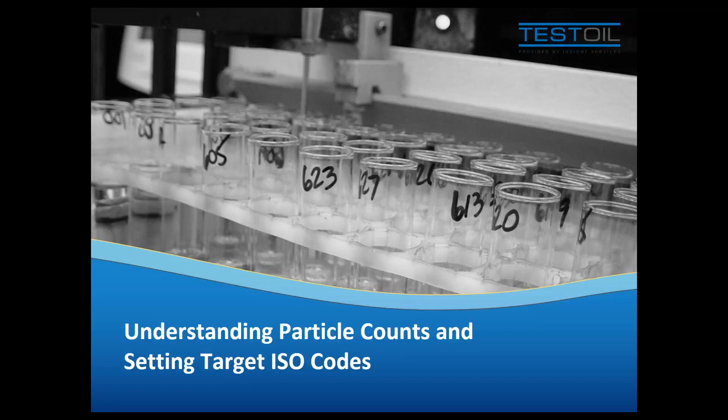Today's presentation is about understanding particle counts, which will be about half the presentation, and then we'll finish up with a little bit on setting target ISO codes. But before I get into any of that, I thought it would be best if we begin with a discussion about why we're so concerned about particulate. Why are we doing a particle count in the first place? That helps us understand to a point what we're trying to achieve here.

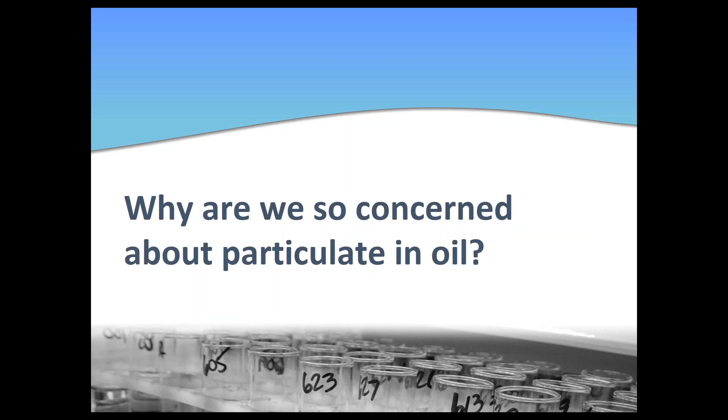I've got three different studies I'd like to show you. They're all widely cited. Lots of people have used them, so you might have seen some of these before. The first one's kind of one of my favorites. This one's by Dr. Rabinowitz, and he was working at MIT, and he did quite a few good studies.

This one, he was looking into the causes of premature failures, but most correctly, he termed it a loss of usefulness. This came out of the Nolan and Heap report when they were suggesting that the word failure needed a better definition, because most people attribute failure to a component basically blowing up or ceasing all operation. They suggested that really a failure was defined as when something doesn't operate the way it should. That definition was further expanded by John Moubray when he wrote Reliability-Centered Maintenance, basically the bible that we all use. So Dr. Rabinowitz was using that same terminology, a loss of usefulness.

He said, what's the greatest cause for loss of usefulness? As you follow this to the right, you can see that surface deterioration is the number one out of the three choices. He chose the word surface deterioration because it's not just a fancy way of saying wear, but because he wanted to differentiate the type of wear. So again, if you move to the right, we see that wear, meaning physical wear, is the biggest cause of surface deterioration, more so than, say, corrosion.

Now, of wear, one of the largest slices comes in the form of adhesive wear, but also abrasive wear. And of abrasive wear, the largest slice seems to come from what we call three-body abrasive wear. The difference between three-body and two-body is with two bodies, you have two metal surfaces coming into close contact with each other. One surface rubs the other, and one of the two surfaces will lose. Basically, it's your sandpaper and wood kind of comparison. But three-body abrasion is when those two surfaces come into close contact, and they may or may not contact each other, but they will have some form of particulate in between them, and that will be rubbed against both surfaces.

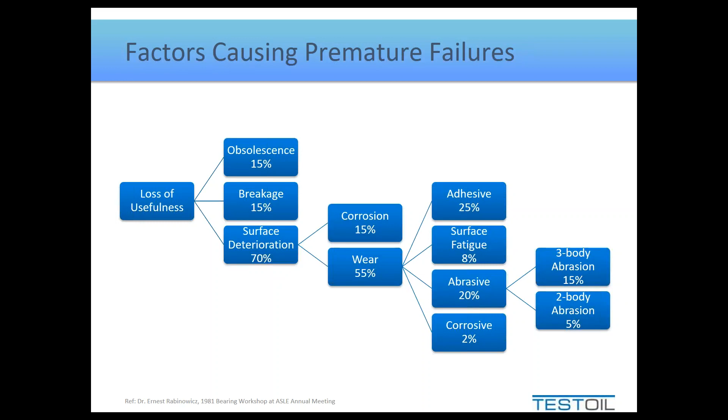Again, at least one of those two surfaces will lose, and that's where we start to see the wear. So the point of this study is that the largest slice of the largest slice of the largest slice is particulate related. That's why we get so concerned about particulate contamination, because it can be attributed to a significant amount of the wear or loss of usefulness that we experience, but it's also one of the most easy to control.

Now, one of the other studies that exists out there is from the National Research Council, and it was trying to define the economic impact of various types of wear mechanisms. As you can see, the largest slice of this is abrasion, which is your two and three body abrasive wear. Then there's adhesion, which is no surprise based on the previous study, but also let's include erosion.

Now, erosion is the same as sandblasting, so this is when particulate is flowing in the oil, and it either encounters an orifice or a rapid change in direction, like an elbow, and the particles will impinge on the surface and create wear. Now, of those three slices of this particular pie, they total 82% of the economic impact due to wear.

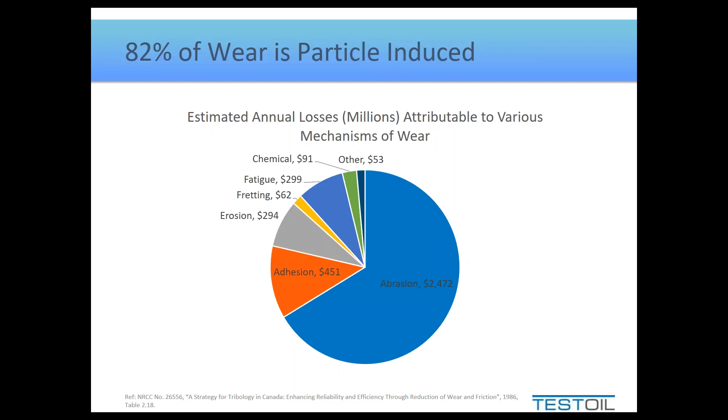So that's where we're getting the title that 82% of wear is particle induced, because these are all going to be accelerated or only capable because of particulate.

The one last study, this one's from a bearing supplier, identifies the most common causes, and the key word here is premature bearing failure, because all bearings eventually by design should fail. But if they don't reach their L10 life and fail early on, the largest causes for that are, again, you guessed it, contamination.

This is why we're so concerned about particulate contamination, because no matter what studies you look at, no matter what the percentages work out to be, it's always the largest slice of the pie. And like I said, it's one of the easiest to control, one of the easiest to justify, and one of the fastest reacting changes we can make to a system is to improve its cleanliness and see that we're reducing wear and increasing uptime and all the good things we're looking for.

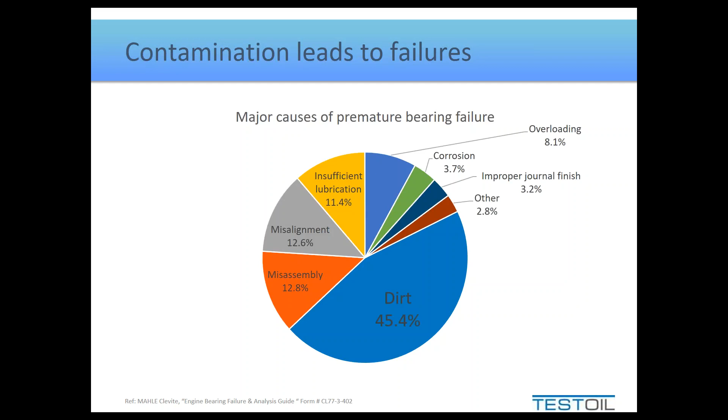So the next question comes down to, well, how big is this particulate? We know particulate's the problem, but how big is it? Because we need to know how big it is if we're going to try and find a way to mitigate it or remove it in any way.

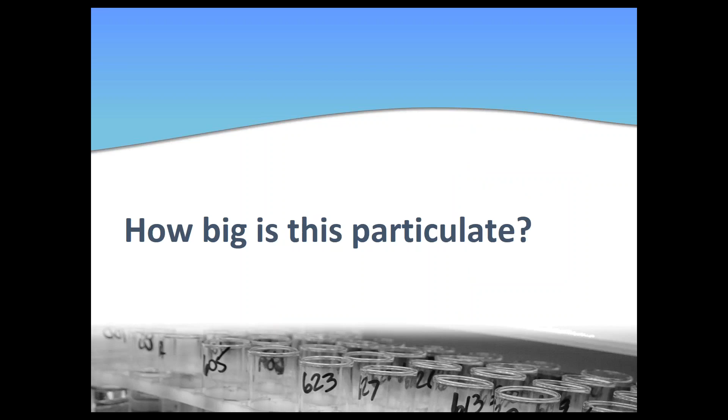Just to begin with a quick definition, so nobody's in the dark here, I'll be using the term micron. For those that aren't familiar with what a micron truly works out to be, it is 1/1,000,000th of a meter. Whether you say micron or micrometer or millionth of a meter, they're all the same thing, there's no difference. For those of you who work in the imperial system, it's about 0.00004 of an inch. So we're talking about a pretty small particle here.

Just to give you the visual comparison, human hair is often used as a good example. It's about 80 microns as a cross section. When we start thinking about dust, it's about half as big.

Now, when we talk about dust and mention this 40 micron value, this is often cited as the lower detection limit for human vision. 40 is the approximate limit for somebody perhaps over the age of 40. But if you're a little younger, or have decent eyesight and don't use corrective lenses, you can truthfully see down to about 25 microns. But whether you stick with 25 or 40, it doesn't really matter.

The point is, as you get smaller and smaller, you start getting into the range of powders and airborne contaminants. And this is where we will concentrate.

So just to show you what size we're going to be dealing with, here's one study. This is done by a bearing supplier, and it's showing the effects of filtration on bearing life. We can take this kind of at face value, because this isn't data from a filter supplier trying to sell us filters. It's from a bearing supplier trying to encourage you to filter your oil so that you'll get the proper life out of your bearings.

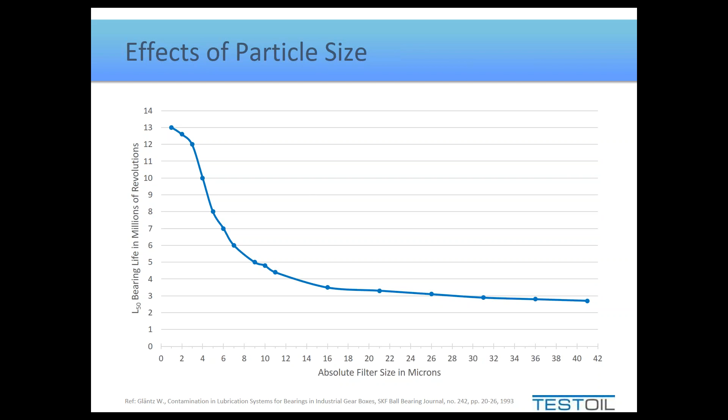So we are talking about some pretty fine filtration yielding some positive results. So then the question is, well, what's the most damaging size of particle? There's a couple different answers that have been published to this question, and here's 2 of them.

But really, what we're seeing here is that we're talking about very, very small particulate. These are the types of particles that actually cause the damage. The larger ones really are of little concern to us because they typically don't cause that much damage.

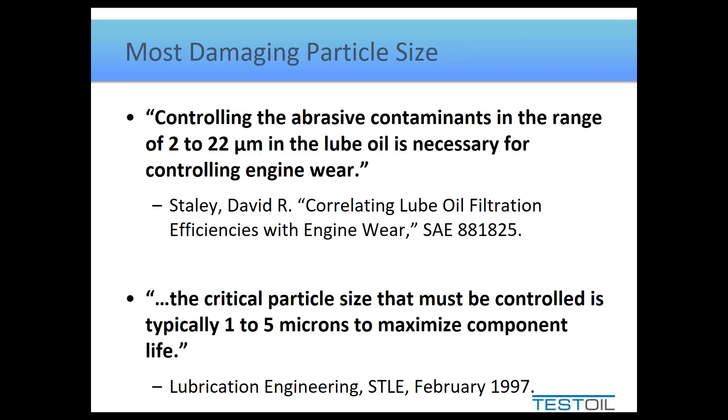Because the best answer to the question of what is the most damaging size particle is clearance size particles. And why are we so concerned about clearance size particles? Because they are the ones that cause that 3-body wear. If a particle is larger than clearance, it can't get in between 2 metal surfaces.

If it's smaller than clearance, it'll go through without contacting either surface. But if it's at or near the clearance size of the 2 parts in motion, well then, we've got a particle that can impinge upon one or both surfaces, causing some damage. And that, of course, is everything we're trying to avoid.

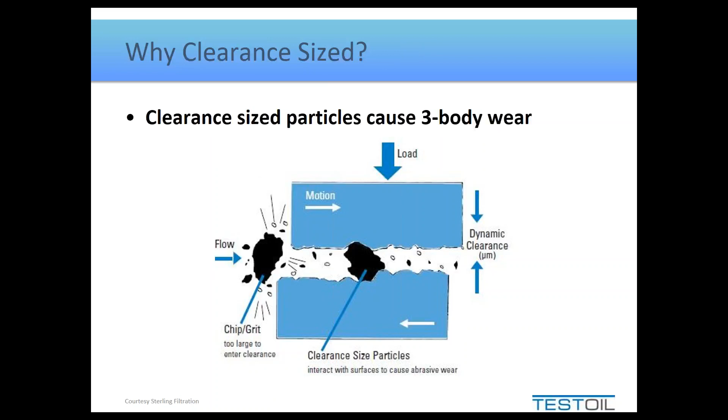So to show you why those 2 answers on the previous slide are kind of the same answer, just take a look at the typical clearances that can be found in many types of components. They do bracket within that 1 to 5 micron statement.

And to be fair, they also fall heavily within that 2 to 22 micron statement. So the point is, we're dealing with clearance-sized particles. Those are the ones that are damaging. Those are the ones we need to be concerned about.

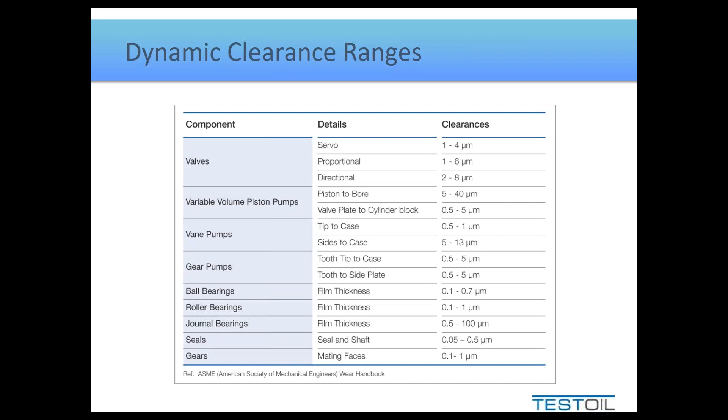Now, the next question typically we have is, even though we know that we need clean oil, we know we want to deal with small particles, we now have this question: where is it all coming from? Because if we know where it's coming from, then maybe we know how we can deal with it.

Because some of it we might be able to stop from ever happening, and some of it we have to take different measures because of where it's being created.

So basically, there's going to be about 3 sources. It's either coming from the outside, it's being generated on the inside, or it was there long before we even got there. So just to walk you through a few of these, I'll spend most of my time on the internally generated.

Because that is of the greatest concern. But I'll walk you through some examples of where they come from in all 3 cases.

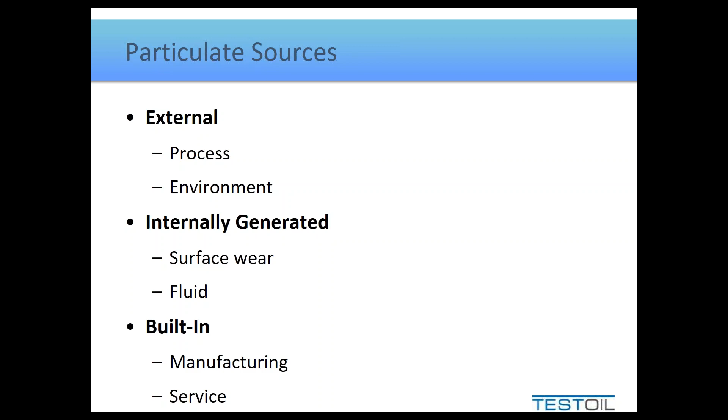From external sources, we have everything that could be airborne. So there's a lot of process-related debris that occurs depending on what you have the machine doing. So if we have the machine operating in an outside environment, well, certainly there's the ability that there's airborne dust.

But what if the machine's actually creating this dust? It's not just from the atmosphere. So I've listed a few things in the process-related column.

And the things I've listed over in the environment are what do we have as mitigation strategies. Right? We know this is in the environment. Even if it's not process-related, there's still going to be airborne contamination.

Well, we have all these strategies to hopefully deal with them. Right? We put breathers on them to try and allow the machine to breathe, but not breathe in a lot of this dust and dirt and whatnot. We might have seals around certain openings or shafts or things like that. We have, of course, a way of getting oil in, and we might even have inspection covers.

But basically, any dipstick, oil plug, fill cap, cover hatch, you name it, is a potential path for the particulate to get in, and anything that may be in the atmosphere is, of course, deemed a contaminant and we're trying to avoid.

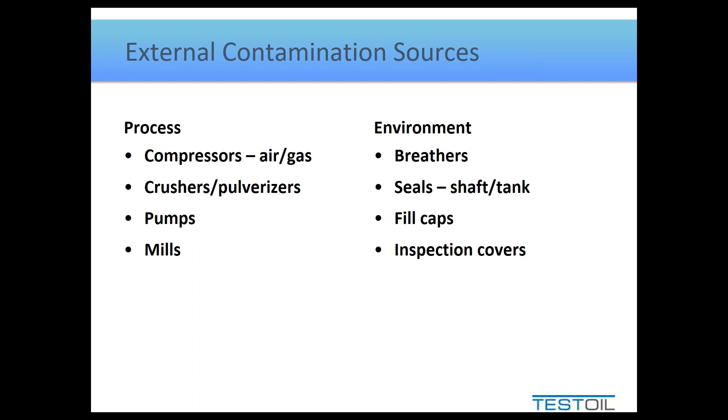But the internal ones, these are the ones that are of greater concern to us because these ones are harder to prevent from occurring and harder to remove once they've been created.

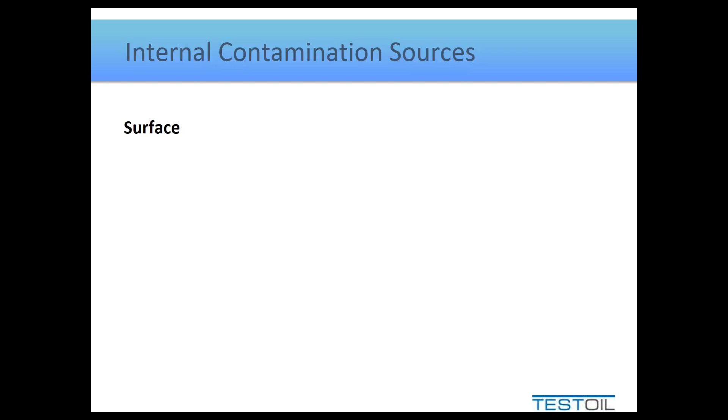So under the surface category, we've got a bunch of different wear modes that can create debris. And these are all because they're wearing at least one of the surfaces that is being contacted by the lubricated parts. So when we have abrasive wear, like I said, that's when one surface rubs against the other one and one of them loses.

If there's 3-body abrasive wear, well then we have a particulate in between, but again, at least one surface is going to lose, possibly both.

With adhesive wear, we have basically a scuffing motion. We have two surfaces coming under contact, and there's a bit more of a pressure gradient here, pushing the two surfaces together, and essentially one is going to smear or scuff off material from the other surface.

If we've got any form of air entrainment in the oil, we can have cavitation, and cavitation is when these bubbles implode and they impinge upon the metal surfaces, generating more wear debris.

Corrosive wear is simply when we have oxides forming. So as the metals come into contact with water and oxygen, we can form oxides. Those oxides tend to be a softer layer on the metal surfaces. It rubs off a bit more easily, so you will get a wearing surface and you'll be generating corrosion debris.

Erosive wear, as I already mentioned, that's kind of like sandblasting. So that's any particulate impinging on metal surfaces.

We've got fatigue wear. Generally speaking, even the most well-designed system with the proper lubricant and everything will run long enough that you will cause fatigue to some of the parts. And as they fatigue, spalls form, and spalls become a contaminant now.

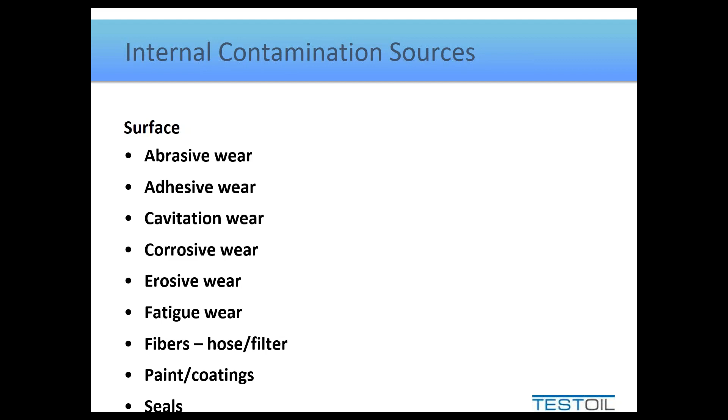About the only other thing that may generate particulate and is not often considered is the seals themselves. We use seals on tank lids, hatches, and so on, and I'm not saying those seals are going to generate particulate. But when we use a seal on a rotating shaft, sometimes the seal itself wears and generates particulate, and sometimes particulate gets in between the seal and the shaft. Now the seal actually encourages a faster rate of wear on the shaft because it's pressing the particulate against the shaft. So it's like a form of three-body wear. But I list that one a little bit separate because it's not often considered.

Now on the other side, we've got fluid. What can be generated just within the fluid? Never mind the wearing surfaces, the mechanical parts that we're trying to lubricate.

Well, depending on the synergies that may be involved here, if we've got significant cross-contamination of two different types of fluids, or if we get something like water in the system, we can actually cause the additives to drop out. And when the additives begin to drop out, they can be viewed as a contaminant because now they're not behaving in the manner they're supposed to, and they may take on a slightly different form that can lead to either filter plugging, or just the lack of protection might lead to increased wear.

We've got carbon particulate that can be generated. Now, lots of people have experienced this without knowing what was happening, but if you've ever had a system that had rapid darkening of the fluid, and within a matter of a week or two weeks, the fluid has gone from its clear or light yellow color to a very dark color, and you're wondering what has happened, typically when it approaches a black color, it's because of carbon particles, and those can be generated one of two ways: electrostatic spark discharge or microdieseling.

For those that don't know what these two terms are, a quick definition: electrostatic spark discharge is when you create a streaming potential on the fluid. Now, if you flow any fluid through an orifice, it will generate static electricity. The question is will it build up to be high enough that the discharge of that static electricity causes burning of the oil. And where it discharges will always be where there's a grounding within the system.

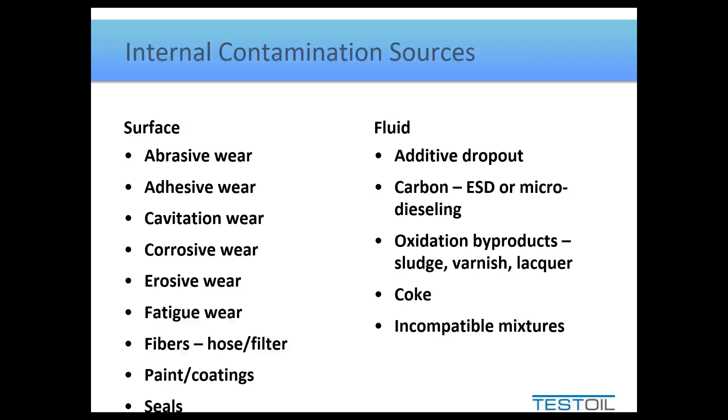But those are all fluid-related forms of contamination. They don't necessarily have to equate to small, hard particulate, but they are things that we might consider as a potential. The last category, though, is everything that was built in.

And one of the funny things about maintenance is often the more maintenance you perform, the more you introduce contamination. So every time we open something up to perform a repair or an inspection, there's the potential that we've allowed airborne contamination to get in, or we've not replaced a seal properly, or we've potentially damaged a seal that is meant to protect the system.

Certainly even something as simple as a top-up of fluid will again provide an opening into the system whereby we might put in more contamination. And that could come from the oil itself or any of the tools we use to get the oil into the system. Certainly lots of people leave out funnels, and funnels, when they're oil wetted, they are just dust magnets. And if you don't clean that funnel before you use it, well, you're going to be adding in a bunch of that dust into the system as you pour in your hopefully fresh, clean, new oil.

On the other side here, I just listed a bunch of different ways that during the manufacture or assembly of machines, we can have sources of particulate or generate additional particulate during the commissioning or building of a system. And so these are all forms of contaminants or methods of generating contamination within the system.

So this is where it's all coming from. Now, funnily enough, we know this, yet we still reach a point where we are running systems and they've got dirty oil in them. So a secondary question I have is, well, why is this? Why do we have all these sources being unchecked?

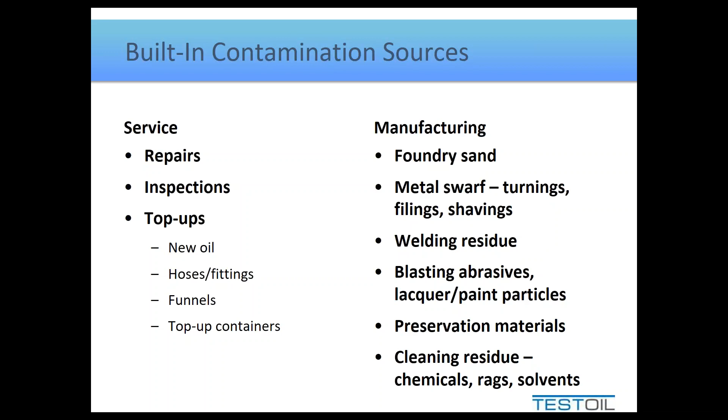So the two big points I like to make are, one, new oil is not clean oil. And it's not to harp on lubricant suppliers and say they're doing a lousy job. Let's look at it from the other perspective. What does industry say is the recommended cleanliness for fluid?

Well, here's a very popular standard. It's been widely cited, lots of people use this. It's the ANSI-AGMA standard for industrial fluid. And this is what it has to say about cleanliness, and this is a direct quote.

It just says it must be free of visible, suspended, or settled contaminants at the time it is installed for use. So basically, if you pull a sample of your new oil in a transparent container and look at it and don't see anything with your eye, it's considered clean enough for service. Well, like I said, remember that the human eye can detect down to about 25 to 40 microns.

That's not the size particles that we know is causing all the damage. That's the size of particles that's large enough that, really, it's not that we don't care, but it's not our primary concern. So we've got a very poorly written standard here that many of us are working against to suggest how clean the fluid must be.

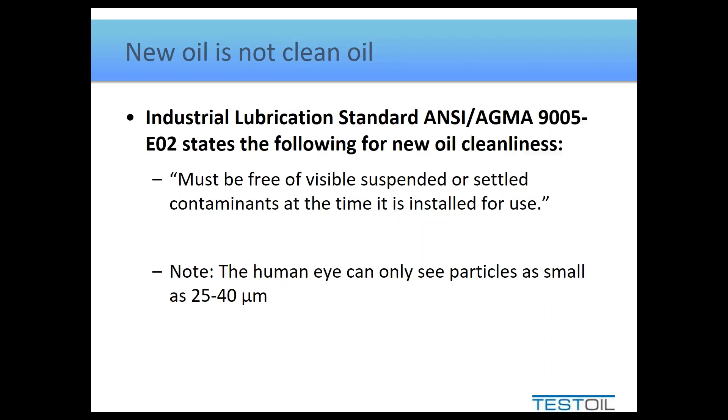So they don't give any allowance for the size of the system. They say one hour of flushing is adequate, provided you meet some qualifying statements. But when they dictate what the one hour flush is, they're saying it's only at design flow rate. They're not suggesting this is supplemented with high velocity pumps. They're just saying run oil through the system for an hour and you must yield clean 100 mesh screens.

Now, for those of you who don't deal with mesh and just deal with micron, 100 mesh is about 149 microns. So understand that these screens are meant for removing particulate that is 149 microns or larger -- again, not the size of particulate that we're really wanting to be concerned about.

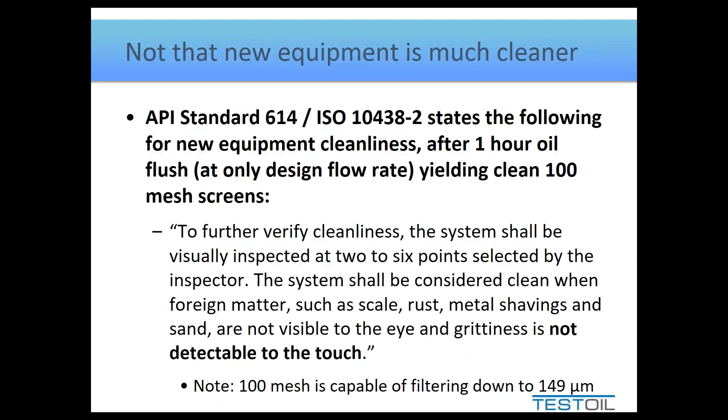So to begin the real part of the presentation here, let's talk about understanding particle counts. How is it that we measure all this particulate? Well, there are two different methods for measuring particulate. I'm going to go through what we term optical particle counting first, and then I'll describe pore blockage second.

So with an optical particle count, if you were to look up the ASTM standard for this, it talks about the scope and the significance, and it does say it's meant for measuring particle contamination. It lists that it's covering from 4 microns up to about 200 microns, and that's dependent on the particle counter, and you'll see why in a second. But the significance of measuring this size of particulate is we know that this is in the range of damaging particulate, and this is important to us.

We don't just want to measure the 149 and larger micron particulate. We do want to get down to some of the small stuff. But understand the cutoff for this test, for the instrumentation used to do this, is at 4 microns.

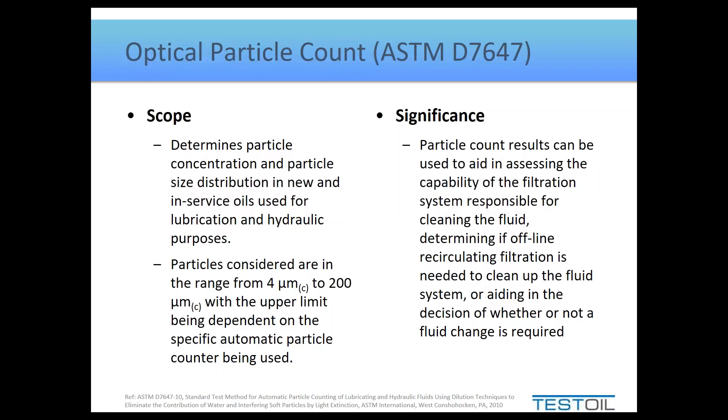So how does an optical particle counter work? Well, in the most basic sense, you take oil and you flow it through a very thin cell. Now the cell is about 100 micron thickness. So right away you should appreciate that if a particle is much larger than 100 microns, it can't get into the cell.

So there are going to be instances where some really, really large particulate might not be measured by this test. But again, that's probably not our most concerning point about the particle count, because that's so large, hopefully it gets knocked out by a filter or it settles out within the reservoir and is nowhere near our clearance sizes.

But we flow oil through this cell, and on one side of the oil film, we have an intense source of light. Now, often this is referred to as a laser because it kind of looks like a laser, and we might use similar technology for generating the light source. So this beam of light is shone through this film of oil. Now, this film of oil is moving, it's flowing, and it's aimed at a photoreceptor. The photoreceptor is the same kind of sensor that we would use in a digital camera.

Similar technology to that. What this sensor sees is it sees the light. Now, as a particle goes by, what it doesn't see now is the light. It sees instead a shadow. So this instrument basically sees shadows, and that's what it's using to determine its particle count. It is going to both count and size the shadows.

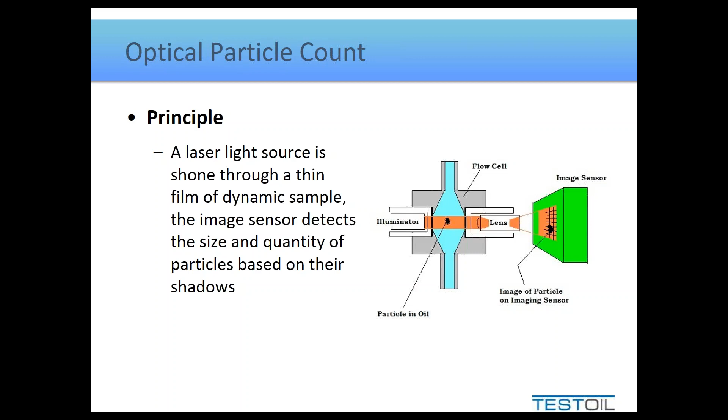So thinking about spherical equivalency just for a second, understand this. If I have a 10 micron by 1 micron particle, that's going to generate a shadow with an area of 10 square microns. But like I said, the way this particle counter understands or interprets the shadow is it assumes the particle's a perfect sphere. That's why it's called spherical equivalency. Now, a sphere will make a round shadow, and a round shadow is going to be measured by its diameter.

So if you take this shadow that we're looking at right now, 10 square microns, and determine it by spherical equivalency, what you're going to end up with is a 3.6 micron diameter circle, because that would be a 3.6 micron diameter sphere that would create that shadow. It still has the area of 10 square microns.

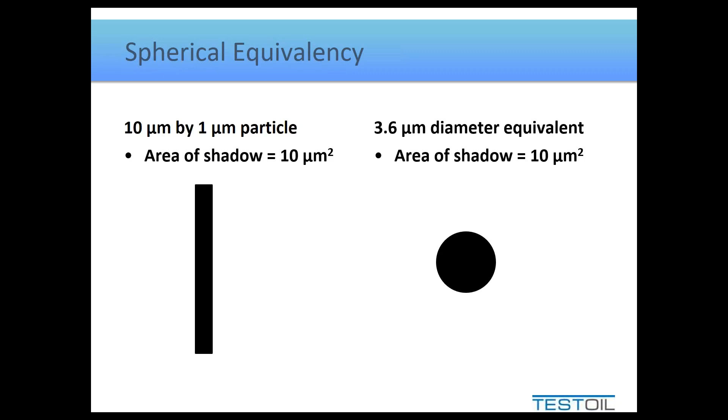This is the point. So why am I mentioning this? Why do I think this is important to note? Well, what was the one thing we know about this test in terms of its scope? It begins measuring at particles larger than 4 microns. So that particle over on the left wouldn't be reported by this test. It's too small.

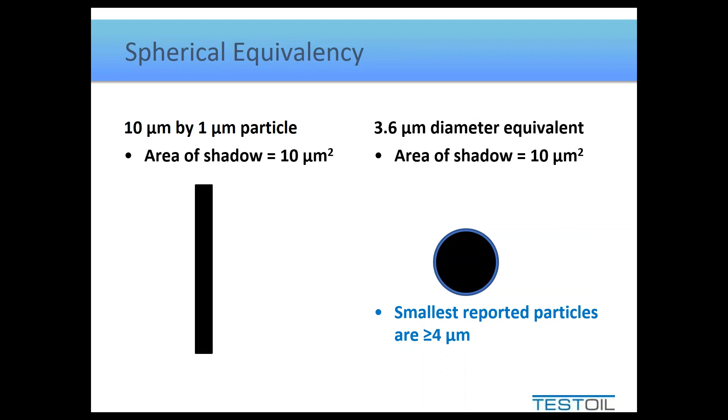So right away we need to understand and appreciate that when it comes to optical particle counting, we are not sizing the particles based on any true measurement. We're making a major assumption here that the particles are spheres, which we know they're not, but it's just a nice standardized way of coming up with a repeatable value. On the other hand, it means that particles could be, and I'm using an extreme case here, 10 microns long and only 1 micron thick, and they would go undetected.

Now, in terms of the limitations of this test, for one, it doesn't identify the type of particle. It doesn't tell you if it's metallic or non-metallic or hard or soft or what. It's just a count. I always joke, that's why the test is called particle count. What more do you expect? And from the scope, it says it measures anything larger than 4 microns, generally up to about 200 microns is the cutoff, because that's about the largest spherical equivalent shadow that can appear on the detector based on the size of particle that can get into the instrument.

But the other factor is interferences. As I already mentioned, a lot of people already know this, that when it comes to shadows, other things can create shadows. So there will be some false positives or some skewed high results based on other things being in the fluid. Now, to be fair to optical particle counting, they don't have to be that way.

You can dilute the sample with a solvent, and therefore that would help remove some of these effects. By thinning the sample out, air bubbles will come out a bit easier, and if you're using the right kind of solvent, you can cause the water to be more emulsified in the sample, and therefore it won't form the water droplets that will create that refractive difference. It makes the shadows appear. So there is a way around this, but it does require extra steps, and this is often done at the laboratory level.

But to be fair to anyone who's considering or already using any form of portable particle counter or an online or inline particle counter, understand the technology in those particle counters is the same as what I've just been describing here. It's a very popular form of particle counting. The detector, the laser, everything largely the same, but your sample prep is different. And therefore, most on-site or online particle counts will be higher than a laboratory one, because labs take these extra steps to help remove some of these effects and give you a true hard particle count.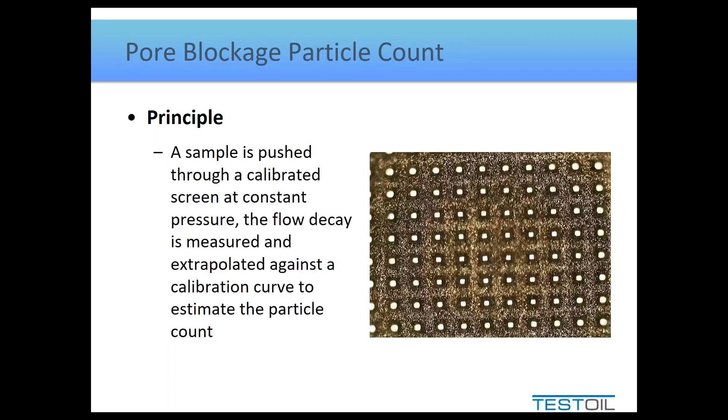But to be fair, this is the big limitation to this test. The distribution of particulate is extrapolated, and it's assumed to be a fairly linear distribution. So if you're doing any form of filtration on the system and you know you're removing a certain size particle and up, well, we're basing our measurement off whatever the pore size of the screen might be, which is typically 5, 10, or 15 microns, and we're extrapolating all data from there. So it might not give a representative view of your filtration activities in terms of an exact shift at a certain micron size.

You will still see it because the particle count will be lower. You will know it's being effective, but you might not get quite the nonlinear distribution of particulate that you would expect based on your filter. So both optical particle counting and pore block particle counting have their own limitations, which we can usually live with.

The cool thing about pore block, though, is it doesn't have the same interference that optical does, which means we don't need anywhere near the sample prep. So it's a much easier test to get repeatable, and that's the important thing.

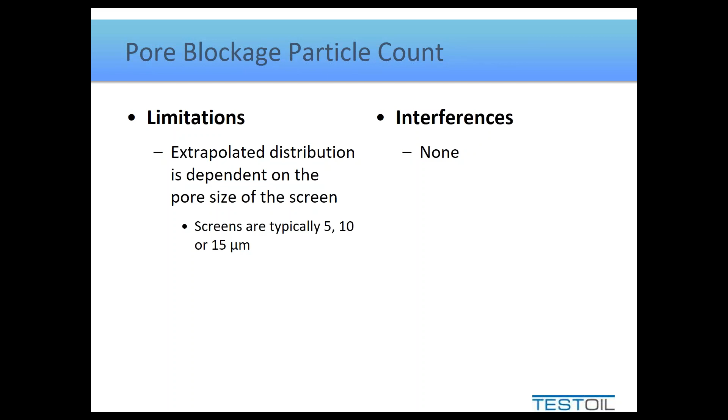But that leads me into the next question: how repeatable is a particle count test? Going to the ASTM standard for optical particle counting, which has had an interlaboratory study done, this is the data they've published. The long and the short of it, I've underlined at the bottom.

What this means is that if you look at the reproducibility values, which is basically the same sample split between two labs, we have around 100% or higher variance in the data, which can, not necessarily will, but can account for up to a 2-code difference from one particle count to the next. I mean, 100% will definitely be at least one ISO code variance, but it can potentially mean 2 codes.

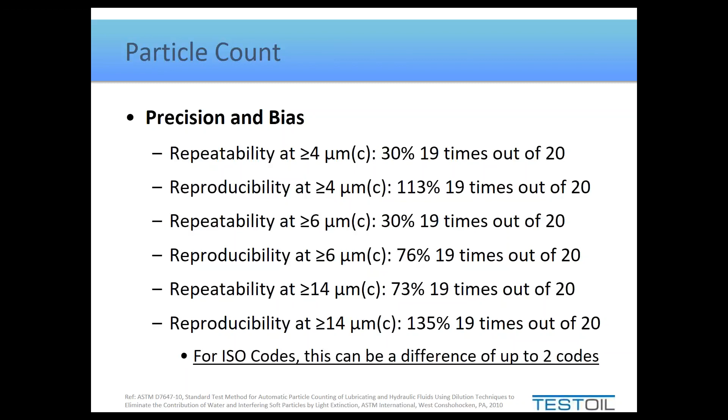So hold that thought for a little while. I'll address it again towards the end. But when we talk about particle counting, we do talk about ISO codes all the time, and ISO codes are not necessarily widely understood. So let me segue here and talk about the results just for a second.

So how do we get an ISO code? Well, when we do a particle count, we do the count in various sizes and ranges. The 3 ranges that we use to determine a code are greater than or equal to 4 microns, 6, and 14 microns. Now, the important thing to note about these 3 ranges is that if I count a particle as being greater than 14 microns...

I'm certainly going to count it again as being greater than 6, and I'm going to count it again as being greater than 4. So as such, the 4 micron particle count is always the highest count, followed by the 6, followed by the 14. Just think of these ranges as essentially 4 to infinity, 6 to infinity, 14 to infinity. Now it's not really infinity, but the point is it's not 4 to 6 microns, 6 to 14 microns, and then 14 to some other value.

It's basically everything larger than 4, everything larger than 6, and everything larger than 14. So it's what we call a cumulative count.

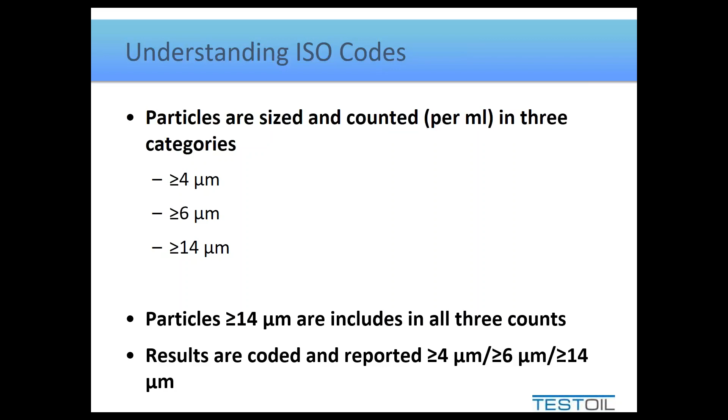Now these three ISO ranges are now coded, and this is where the confusion tends to set in. So we need to take an actual particle count and turn it into a code. Well, ISO comes along and it gives us this table on the left, these lovely ISO codes.

Now, if you look at either of the two tables on the right, those are examples of a particle count. So you can see how the particle count is pulled from the ISO codes. In these two examples, the top right one says a particle count of 151,773 particles per milliliter. If you look to the left in the table, that falls between 80,000 and 160,000, which is given an ISO code of 24, and you would code that 151,000 as an ISO code of 24.

And you can keep reading down the list. You can see the little lines in between each one as it corresponds. So the long and the short of ISO coding is you take a count and you look it up according to this chart, and it'll tell you what the number is to assign to it.

Now, I'll get to that in just one more slide, but as a quick note about ISO codes, if you notice the pattern of how they came up with the code to match the range, just start looking from the bottom of the list upwards. So when you get to an ISO code of 10, it means you have between 5 and 10 particles per milliliter in the sample. If you go up a code to 11, it now doubles to 10 and 20.

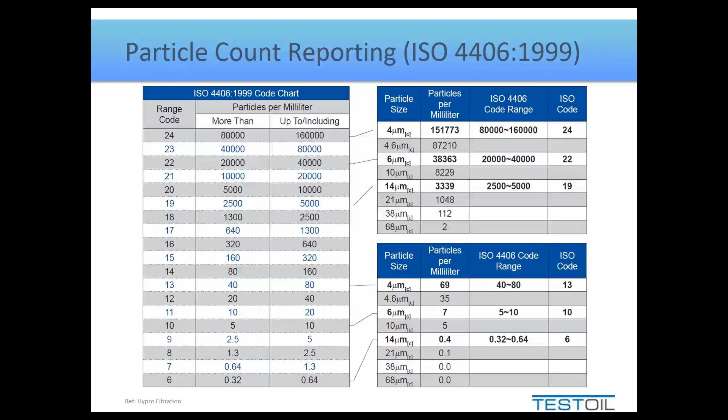So the values are doubling every time you go up an ISO code, which not only means you're counting twice as many particles, but the overall range of that ISO code is twice as large. So you get some pretty large ranges as you get into the higher ISO codes. So using this table just for a second, the one on the left, and coding results, let's walk through an actual example, not just the ones that appear here.

So if I present to you this data, and I show you your first, your second, and your third sample, you can see the particle count data below, but I've left the coding blank. Now to code these, what you would do is look up each one of these values on the preceding chart.

So as an example, 1357 falls between 1300 and 2500, which is an ISO code of 18. So the very first number I'd write is 18.

361 particles is between 320 and 640, which happens to be an ISO code of 16. So the next number I'd write would be 16. And then 42 falls between 40 and 80, which is an ISO code of 13. So the last number I would write is a 13.

So that first sample would code out as 18, 16, 13. Well, funnily enough, if you try the second sample and the third sample, they're all going to work out to 18, 16, 13. And that's kind of the point of ISO.

Because why did we take one set of numbers you didn't understand and turn it into another set of numbers you still didn't understand? The point was that we tried to group the numbers so that we could see, relatively speaking, when they were similar. And all three of these particle counts are viewed as in the same ballpark as each other. So ISO says there's really no difference between these particle counts, so don't dig into the few hundred particle difference you're seeing here. To them, they're all within the same ballpark.

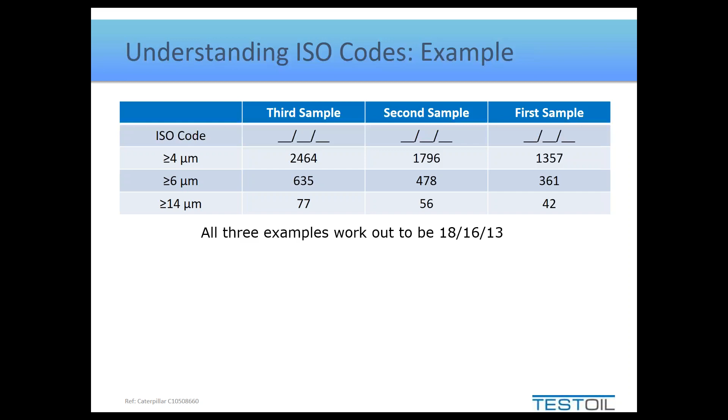But like I said, we took one set of numbers and turned it into another set of numbers, and 18, 16, 13, well, that's a nice set of numbers, but probably still doesn't make any sense. You're looking at that going, well, is that clean or is that dirty? I don't know. So thankfully, somebody tried to address this, and Caterpillar came along and did a nice study.

They found that it would take about half a teaspoon of debris to contaminate an entire 55-gallon drum to a level of 18, 16, 13. So now I can use this. I can go, okay, if I see a particle count of 18, 16, 13, that roughly equates to half a teaspoon of material in 55 gallons. That is tangible now. I can now take a particle count and work with that.

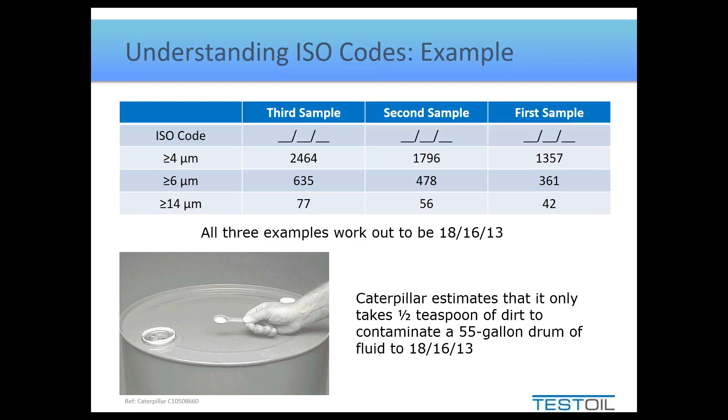So if you understand ISO codes, every time you go up 1 code, you double the particles. When you go up 2 codes, you double it again. And when you go up 3 codes, you double it yet again. It's suggesting that a 20, 19, 16 would in fact be about 4 to 8 times dirtier. So 4 to 8 times a half a teaspoon means you've got between 2 and 4 teaspoons of debris in every drum of new oil you've ever purchased.

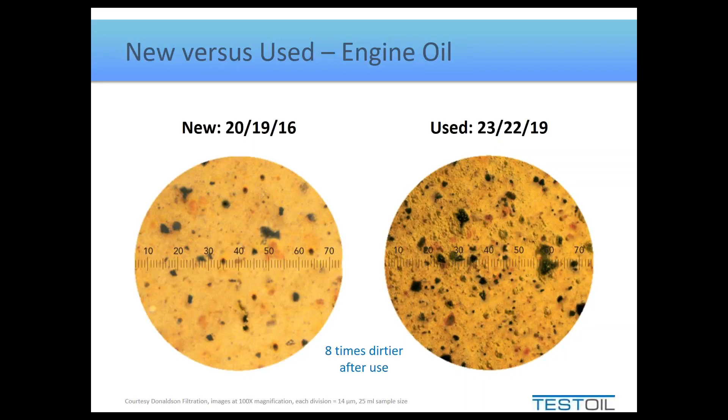Now, if you can appreciate that 8 times dirtier, hopefully you can appreciate this. Imagine you take that new oil, which I said has between 2 and 4 teaspoons, roughly speaking, based on the Caterpillar study, and we try to put it into a hydraulic system. Well, a hydraulic system is looking for oil that has an upper limit of 16, 15, 12.

Well, that is 4 ISO codes higher, so that is 16 times dirtier. So our 2 to 4 teaspoons are about 16 times more debris than we're looking for. We're wanting a quarter of a teaspoon, maybe an eighth of a teaspoon maximum per 55 gallons.

So this just goes back to when I said sometimes the contamination is due to the fact we've added oil. And it's not necessarily that we use dirty tools to add the oil. Sometimes it's that we didn't pre-filter the oil going in.

So we need to appreciate what an ISO code means, how you interpret the ISO codes. Basically, every time you go up a code, it doubles, to understand where we are and where we want to be.

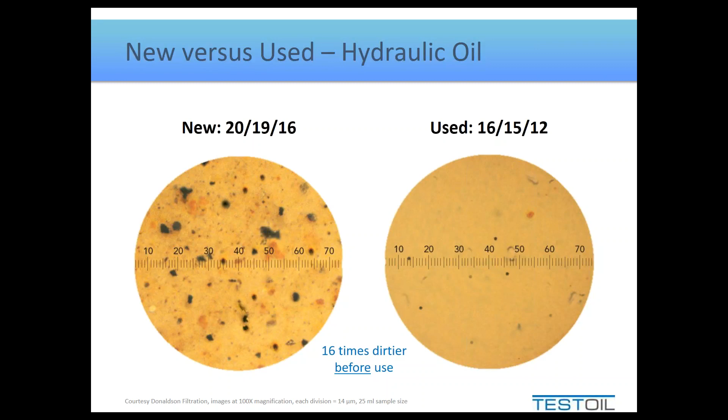But what I'd like to move on to is, why does my particle count go up? We know how we measure particle counts now, and we know all these sources of particulate. So it's going to be obvious to us where most of this comes from, right?

Most of the particulate we're seeing has probably been ingressed from the outside, or it's been generated on the inside due to wear mechanisms. If it's ingressed from the outside, we know the list of possible sources and the reasons. It's anything that breathes - any opening, dipstick, fill cap, hatch cover, you name it - any path it can find, it will go in.

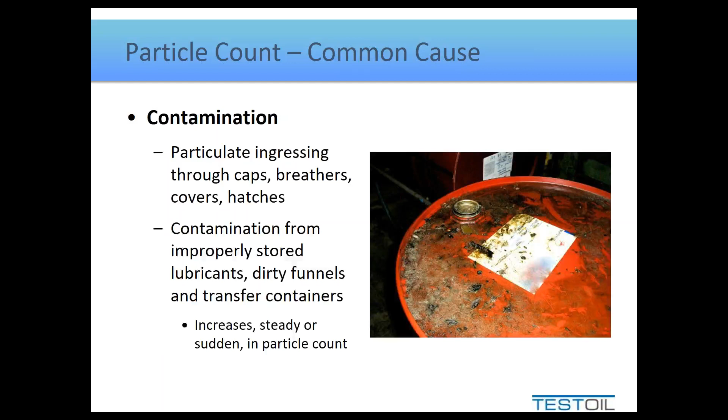But what else causes our particle count to go up isn't necessarily a mechanical issue. It could just be where or how we sampled it. If we don't flush the sample point fully, or we don't wipe the debris around the outside, we may get particulate in the sample bottle that's not really representative of the fluid flowing in the system.

One of the other ways we get an increase in particle count is when the filters don't function. If the filters go into bypass for any reason - it could just be that the bypass was left open, or they're starting to plug up - we will no longer be mitigating the increase in particle count, and we should expect that as new particulate is ingressed or generated, the particle counts will slowly rise.

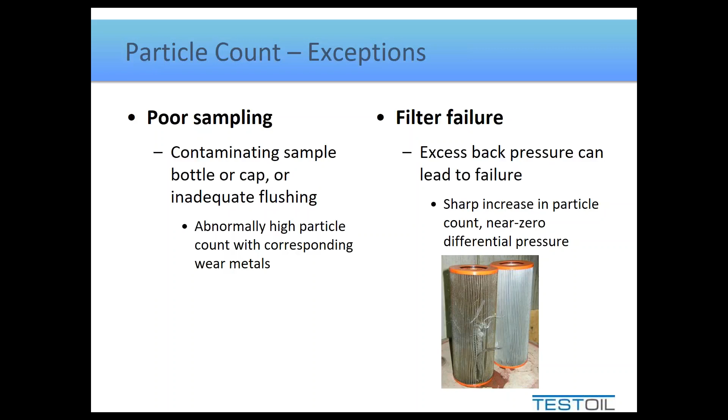But one of the other factors that comes up is when people start plotting particle counts, they start to notice a pattern based on filter changes. This is the most common pattern we see: the sawtooth pattern. We'll see an increase in particle count, then we get a drop, and then it'll increase again, then we get a drop.

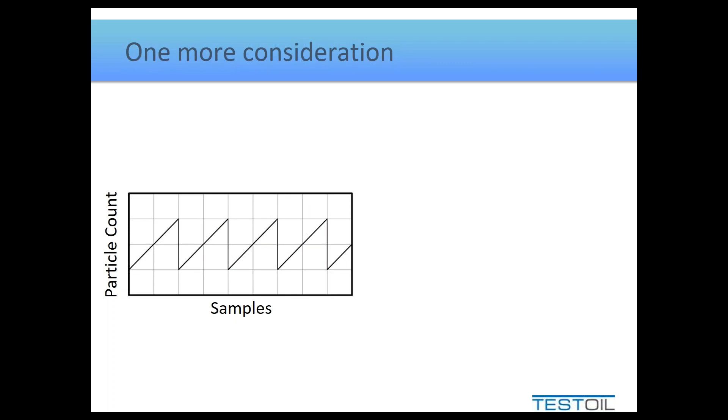Now, the assumption is that every time we change the filters, we will get an immediate drop in particulate. What I'd like to share with you, though, is this is the reality.

One company I used to work for a number of years ago was a filter company, and we were doing some research trending particle counts. What you notice is that in many systems, the particle count actually increases immediately after a filter change, and then it begins to decrease.

But the problem with seeing this pattern is many people have attributed this little rise before the drop to filter efficiency. You'll hear people comment that new filters aren't as efficient as used filters, that it takes them a while to block off the big holes. I'm here to tell you that's not the reason.

The biggest reason you see this pattern is when you use cartridge style filters, not spin-on style filters, and many of us use cartridge style filters. The big reason you see that increase is because, as I like to point out about filters, filters stop a lot of particulate - they don't necessarily trap the particulate.

So when you have a filter housing with a cartridge filter inside of it, oil goes in with particulate and oil may come out without that particulate. The particulate is somewhere within the housing, but it's not necessarily trapped inside the filter, so when you change the filter, you're not necessarily removing all that particulate.

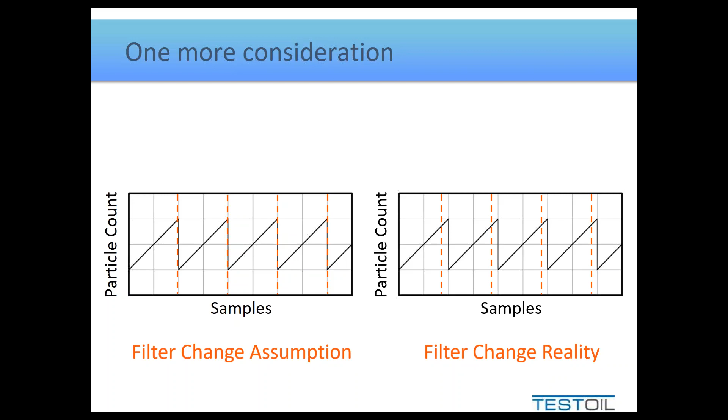When you do not drain the filter housing before you remove the filter, when you pop it off the bottom of the filter housing, oil is going to sluice from both sides towards each other. And you might get some of that particulate on the dirty side of the filter washing itself over onto the clean side of the filter housing.

Meaning a lot of that particulate now may start running through the system. But it's just one more reason to point out why a particle count might go up, and if you're trending particle counts very frequently, you may notice that immediately after filter changes, the particle count does actually continue to rise, might even spike a little bit. I'm just suggesting this is one of the causes.

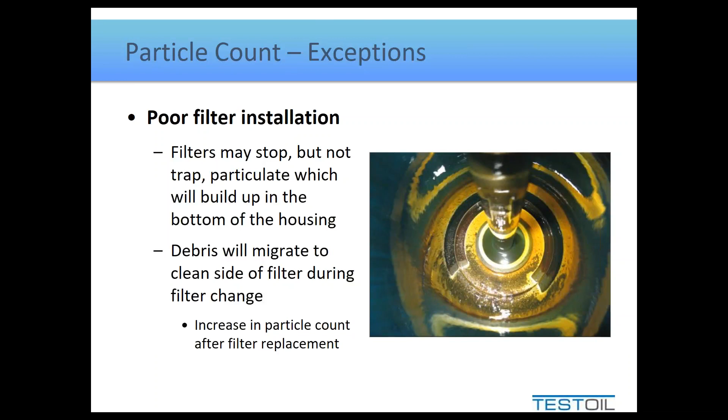Now, something of quick note here, the pitfalls. Just a few notes about why people misinterpret increases in particle counts.

Again, going back to how or where you sampled it, that's one thing, because if you see a lot of particulate in the sample, but you don't see a lot of corresponding wear, the question is, why wouldn't all the particulate or contamination cause the wear? It's because maybe it's only in the bottle, it's not in the system. So when you don't wipe the outside and a chunk falls into the bottle, it will show up as part of the particle count. It doesn't mean it's within the system, and you get these sort of atypical results.

Also, sampling from dead legs tends to do this too. But the other thing, the big pitfall with particle counting is this.

A lot of people will look at an increased particle count and they will immediately look to the elemental spectroscopy, and they will wonder why they don't see an increase over there. They go, well, if my particle count's going up, why is my iron or my silicon not going up? Because iron is the most common wear element and silicon is the most common form of contamination. People look for that correlation all the time, but funnily enough, these two tests don't actually overlap that much.

Particle counting is 4 microns and larger, whereas elemental spectroscopy typically measures accurately in the 0 to 5 micron range. Between 5 and 10 microns, it loses its accuracy significantly, and pretty much anything above 10 microns is not measured accurately at all. So these two tests don't actually overlap, and that's a very common mistake people make when interpreting them.

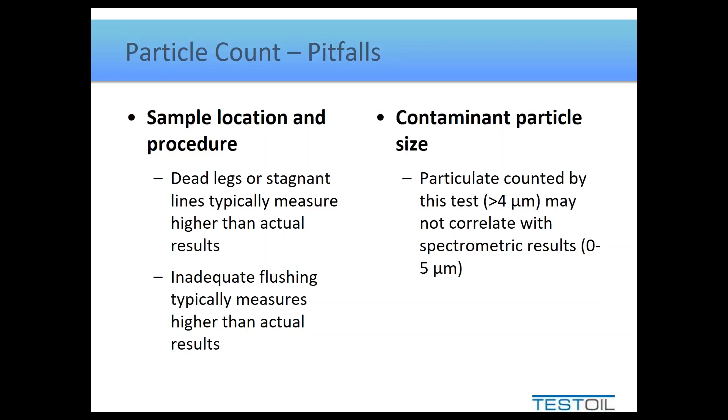So there we have how we do a particle count and sort of how we interpret the results, generally speaking. The last and final question we have then is, well, how do you set a target? How much is actually allowed?

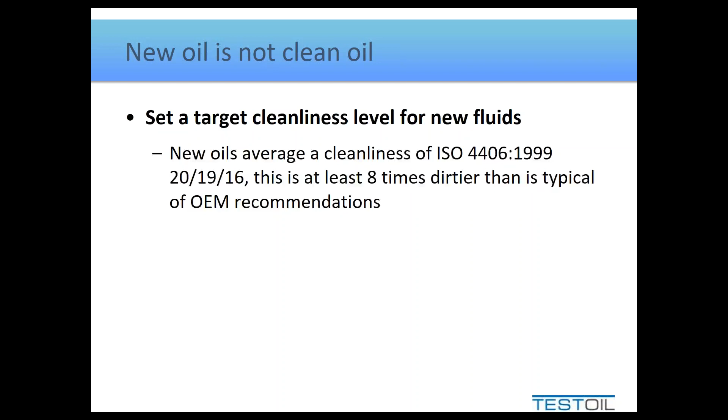Well, again, reiterating, new oil is not clean oil. So we know that we are probably not even starting off with oil that is clean enough for what we need. And when we're setting these target cleanlinesses, they apply to the new oils as well as the running system. Like I said earlier, new oil is typically around a 20, 19, 16, give or take an ISO code, and that tends to be significantly higher than most OEM recommendations. When I say at least 8 times dirtier, it's because it's at least 3 ISO codes higher.

But just to give you another visual here, here's your new oil on the left compared to hydraulic fluid under running conditions on the right. Pretty big difference in cleanliness. So we need to set a target.

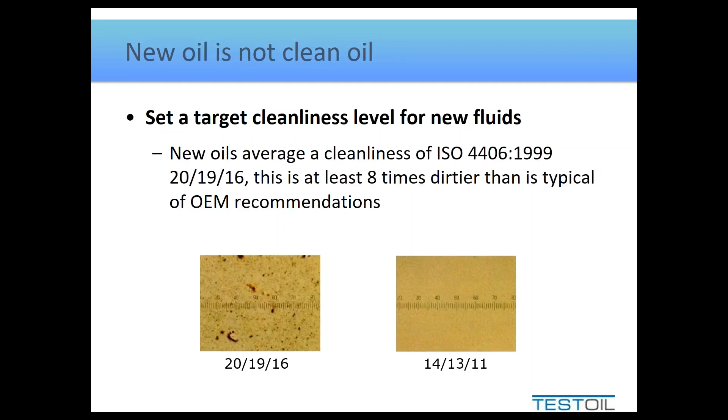Now, obviously, because it's coming from a filter supplier, it's because they're trying to sell you filters and let you know what sort of filter selection you might want. I just use it because it helps me identify if I'm setting a reasonably achievable goal.

You'll notice that these charts list components, not machine types. It doesn't say compressors, gearboxes, hydraulics, pumps. It's specific to the type of component, because this is how you set a target cleanliness. It doesn't matter what the overall machine is or does, what matters is what it's built with, what's inside it that's lubricated.

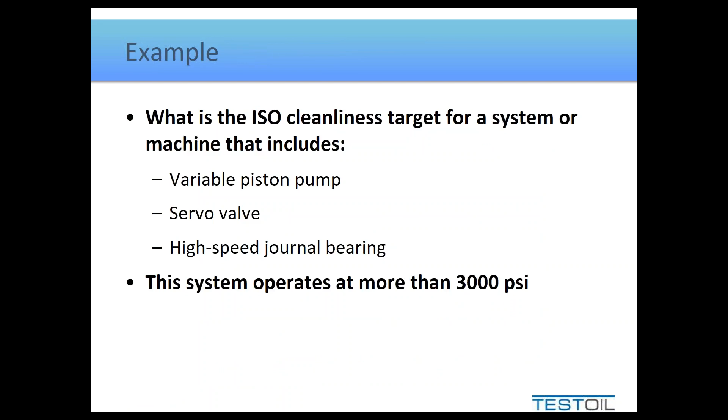What would be the target cleanliness for a system or machine that includes a variable piston pump, a servo valve, and a high-speed journal bearing? This system operates at over 3,000 psi. So we can go back to these charts and look up the data.

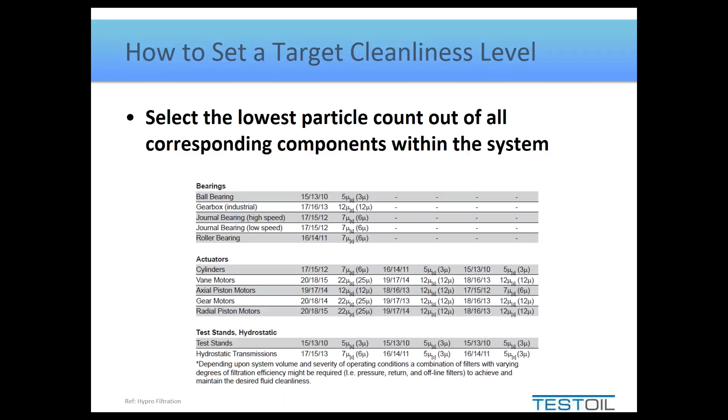The last thing we said was it had a high-speed journal bearing, which you can find in the top table - high speed's the middle row. If you scroll all the way to the right, there's only dashes for the data above 3,000 psi. So we're pretty much stuck using the lower pressure data, but we see it's 17, 15, 12.

So what we got from the table is this: 16, 14, 12 was the value that the variable piston pump required at greater than 3,000 psi. 15, 13, 10 was for the servo, and 17, 15, 12 was for the high-speed journal bearing. So how you pick the target is which one is the lowest. 15, 13, 10 is the lowest.

That is the required cleanliness to properly protect the servo valve. So if it can protect the servo valve, you know that cleanliness is more than enough for the variable piston pump, and way more than enough for the high-speed journal bearing. So now we have a reasonable target.

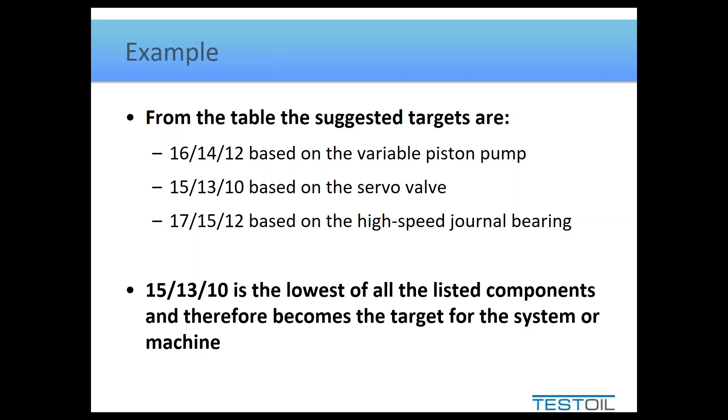But like I said, why I like the Hypro version of the chart is it also mentions what kind of filter we might need to do this. And if you were to go back to the charts and look up the filter for a 15, 13, 10 particle count to be achievable, it's recommending a 5 micron or better, finer filter to achieve that.

So what this helps me understand is that if I'm not using at least 5 micron filtration, I can set a 15, 13, 10 target all I want, but it's going to be very hard to achieve that. So I need to temper my expectations with reality and say, well, what's the point of setting a target I can never hit?

Either I increase my target to something achievable and understand that maybe it's not the optimal or best performance, or I now have to consider better filtration and all the consequences that come with upgrading filtration.

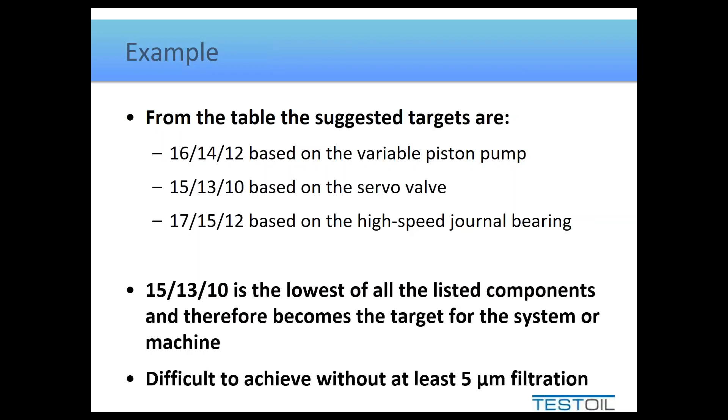So the last thing I want to leave you with is this: this is a target, this is what you're trying to hit. It's very different from when you're doing oil analysis and reading reports, because then you're not looking for the target, you're looking for the limit. And how you set a limit is essentially this.

Whatever your target is, you should go 2 ISO codes higher. The target and the limit should be 2 ISO codes apart, is what I'm saying. And why this is - as I already pointed out - the test is only accurate to within 1 ISO code as it is, so you have to give yourself that much wiggle room to begin with.

But the other thing is, if you don't allow yourself at least 1 more ISO code in terms of tolerance here, you're going to be constantly in alarm, or constantly having to address the situation. So give yourself at least 1 ISO code extra, and that way, until the particle count truly increases from its target value, you're not having to perform a corrective action, whether that be changing the filters, adding a filter cart, or whatever it might be.

But targets and limits are 2 different things. So please, when you go through an exercise of setting a target cleanliness, don't ask the lab to set the same value as your limit, because chances are then you will be constantly in alarm, or you'll be trying to overachieve what is not necessarily required. So it's just, in one way or another, more effort that needs to be addressed.